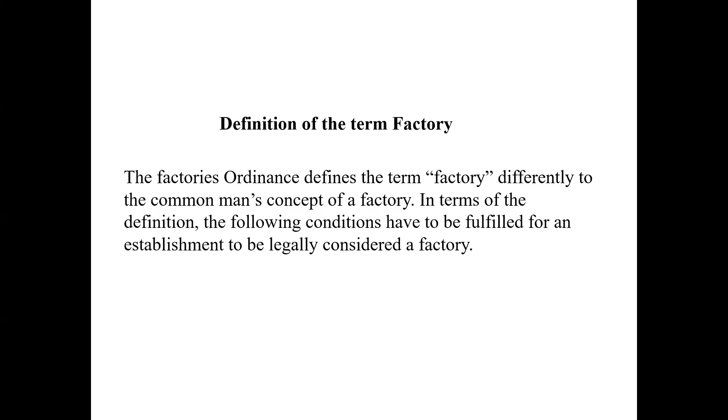So there's a definition introduced by the Factories Ordinance defining the term factory. Number one, it should be situated in a premises. Number two, persons or at least one person should be employed. Number three, in manual labor.

Number four, for making of an article or part of an article, or altering, repairing, ornamenting, finishing, cleaning or washing, or even breaking up or demolition, or adapting for sale of any article. So it gives clear identification for these processes on any article.

Number five, work should be carried out by way of trade or for purpose of gain. Number six, the employer should have the right of access to and/or control of the premises. The owner or organization should have access to and control of the premises of the factory.

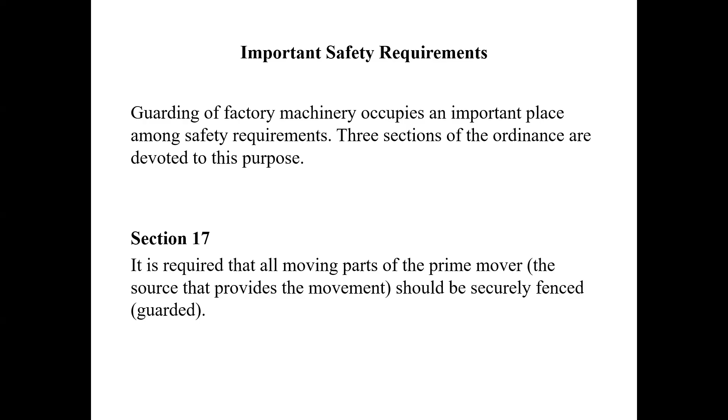Then section 18. It is required that all parts of transmission machinery, such as belts, shafts, chains, toothed wheels etc. - the moving parts - should be securely fenced. So in transmission machinery, all moving parts should be securely fenced.

Then section 19. It is required that all dangerous parts of other machinery - now we have discussed prime mover, then transmission machinery, then we come to dangerous parts - should be securely fenced so as to be safe to all persons employed or working in the factory premises. All moving and dangerous parts of machinery should be securely fenced so as to be safe to all persons in employment. That is very important.

Now what is the dangerous part? The term dangerous part has not been defined in the ordinance. So under the Factories Ordinance, it has not been defined. The only guidance in this regard appears in case law, which interprets dangerous part as: a part of a machine is said to be dangerous if it is reasonably foreseeable cause of injury to any person, acting in a manner reasonably expected of a human being to act, in circumstances that may reasonably be expected to occur. So it gives a general description about dangerous parts.

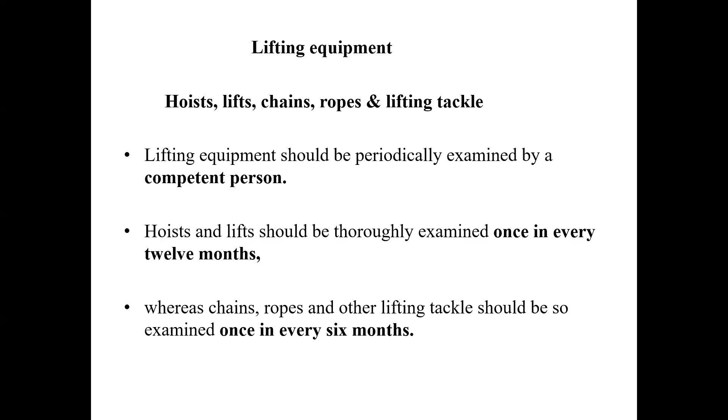So all lifting equipment should be periodically examined. Hoists and lifts should be thoroughly examined once in every 12 months, and given a certificate by that particular competent person, a report saying that all hoists and lifts are safe in working condition. Whereas chains, ropes and other lifting tackle should be examined once in every 6 months and given a certificate by a competent person.

Hoist. Every hoist or lift shall be of good mechanical construction, sound material and adequate strength. Safe working load has to be indicated. If it is to be used to carry people, a safe entrance and exit method shall be available, and a safety locking mechanism for doors should be installed. All these items are covered under section 27 of the Factories Ordinance.

Then we will come to chain, rope and lifting tackle again. No chain or lifting tackle shall be used unless it is of good construction, sound material and adequate strength. No chain, rope or lifting tackle shall be used for any load exceeding the safe working load - you can't exceed the safe working load.

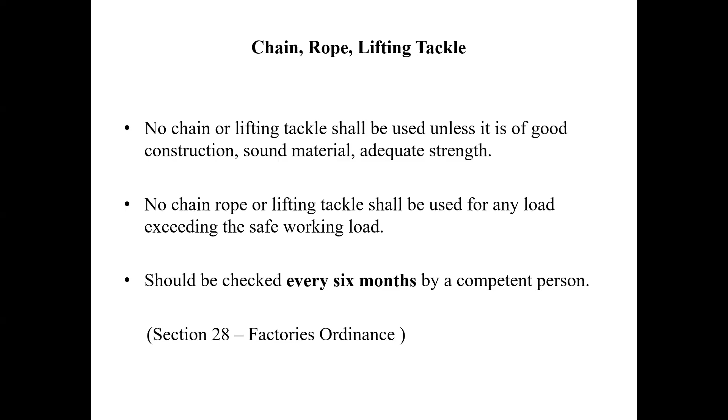It should be checked every 6 months by a competent person, as mentioned earlier. All these sections are covered under section 28 of the factories ordinance.

Now we will come to pressure vessels. Safe pressure has to be indicated in the vessel - that is very important. A safety valve should be installed to the vessel, and a pressure gauge has to be fitted to the pressure vessel. These things are very important in considering pressure vessels.

A testing hole should be provided to inspect the inside of the vessel and for cleaning purposes - there should be a testing hole provided in the pressure vessel.

Test for pressure vessels: for steel or non-ferrous pressure vessels, testing pressure P should be equal to 1.5 times the maximum allowable working pressure, MAWP. So testing pressure should be 1.5 times the allowable working pressure - that is for steel and non-ferrous pressure vessels.

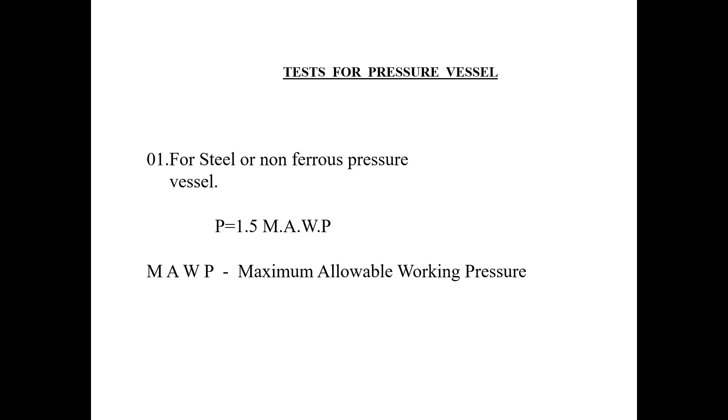For cast iron pressure vessels, there are two cases. In case the maximum allowable working pressure is less than 1 kilogram per centimeter squared, the testing pressure should be 2 times that, that is 2 kilograms per centimeter squared. In case the maximum allowable working pressure is greater than 1 kilogram per centimeter squared, then the testing pressure should be 2 times that value, MAWP.

Then we will see the other conditions of boilers and air receivers. Boilers, air receivers and other pressure vessels should be examined periodically by an authorized person, as mentioned earlier, in accordance with the following time schedule.

Boilers: once in every 12 months. Gas receivers, again by a competent person, once in every 12 months. Air receivers, once in every 24 months. Steam receivers, once in every 24 months. These are laid down in the factory's ordinance regulations.

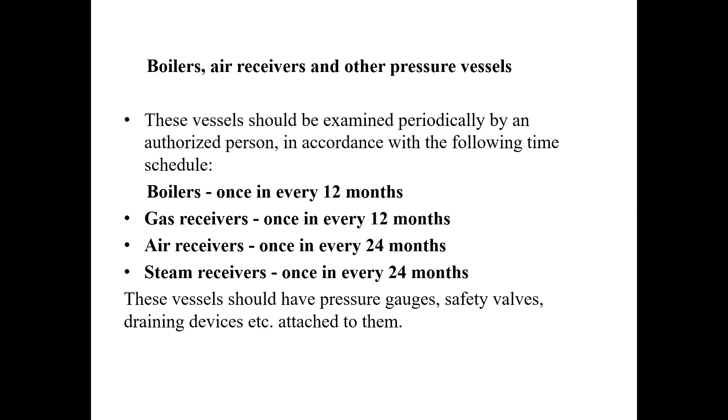Then you can see a cross-section of a fire tube boiler. If you refer to any boiler catalogs, you can see this draft sketch, which gives the fire tube boiler.

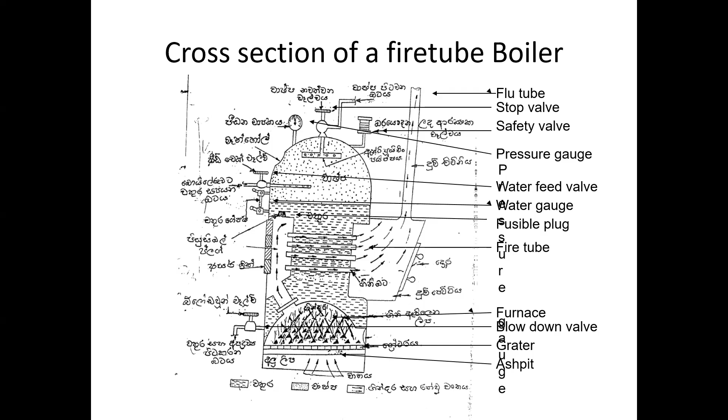Under the Factories Ordinance 1942, number 45, as mentioned earlier, if a boiler is transported or shifted to another place, it should be tested and certified again. So when a boiler is transported or shifted from one working place to another, again this boiler should be tested by a competent person.

And again, after major repairs, it should be tested and certified on completion. When major repairs have been completed, again, it should be tested and certified.

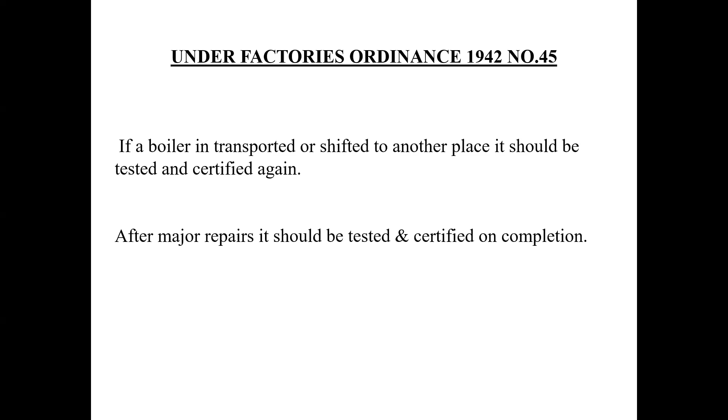Steam boiler attendant certificate of competence. So every boiler should have a boiler attendant. The boiler attendant certificate of competence gives details under the factory's regulation.

As mentioned earlier, under the factory's ordinance, there are many regulations issued from time to time. So, factory's regulation number 1965, published in Ceylon Government Gazette number 14,495, dated 3rd September 1965. This particular regulation covers boiler attendant certificate details.

Class 3 is the minimum level. A Class 3 boiler attendant has to be there up to a steaming capacity of 2,000 pounds per hour. So a class 3 boiler attendant should be available, with 1 year experience as a foreman or assistant to a certificated boiler attendant.

Then we will see the other one, class 2 - higher than the class 3 level, up to a steaming capacity of 6,000 pounds per hour. That person must have 3 years experience attending to a boiler. These requirements are in addition to the conditions for class 3 certificates, so in addition to class 3 qualification, this has to be obtained.

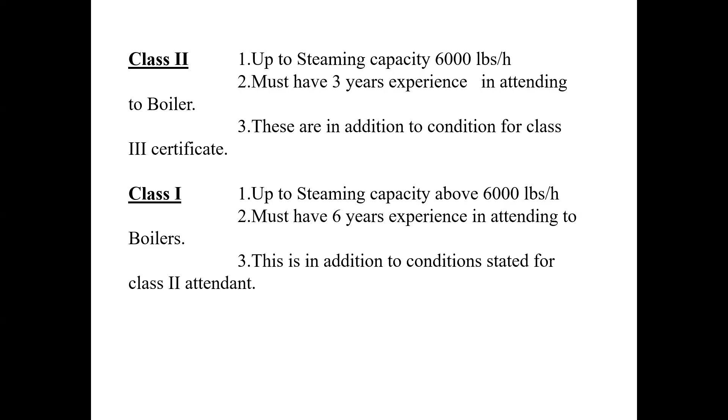Boiler explosion causes. We will see what are the explosion causes of a boiler.

Inoperative safety valve. Low water in the boiler. Scale deposits too high.

When we operate the boilers, the scales are deposited in the boiler, so these scale deposits have to be removed from time to time for maintenance work. If scale deposits are too high, there may be an explosion.

Oil in the boiler water. Corroded or thinner parts of the boiler plates. Cracks in the boiler.

Improper repairs. These are the 7 conditions we have to be very careful about. The safety valve could be adjusted to plus 10% of the marked pressure.

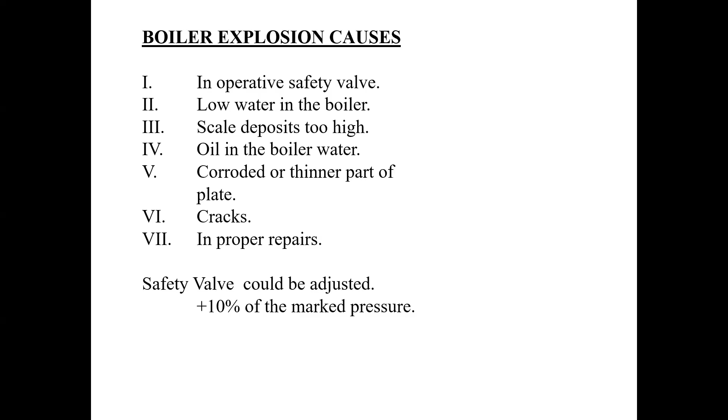Boiler operator's notes. Test safety valve monthly for its performance. Boiler operators have to be very careful about these activities, and should be aware of these things.

Number 2, blow down frequently to clean interior of the boiler. We have to blow down the boiler frequently for interior repairs of the boiler.

Number 3, see adequate lights are there at switchboards, panel boards, water gauge, pressure gauge, temperature meters, and all other important places. Adequate light should be available to see all these things.

Do not depend on fully automatic devices since they may fail. Test all automatic devices periodically.

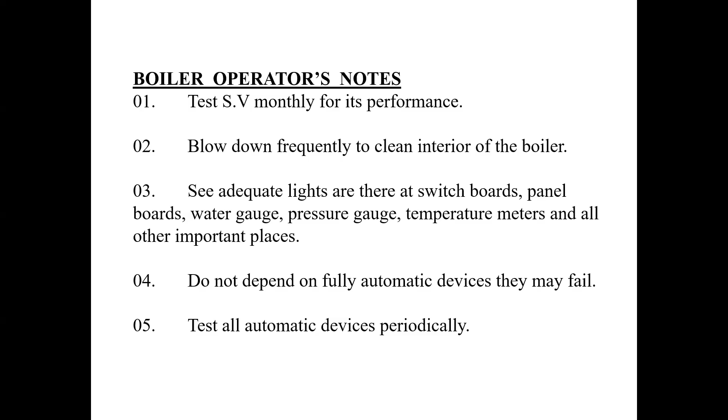Clean the boiler and keep it neat. Check the flame and flue gases at the chimney. It should be light brown color. Check temperature at the stack chimney.

Check the feed water. Clean filters periodically. When switching off the boiler, keep water at its maximum level.

Essential features of a good boiler. Number 1, the boiler should be light in weight, compact, and should use less space. Number 2, it should allow easy, cheap, and quick maintenance work.

These are essential features of a good boiler. It should be capable of starting very quickly. Number 4, it should be capable of accommodating large variations of loads.

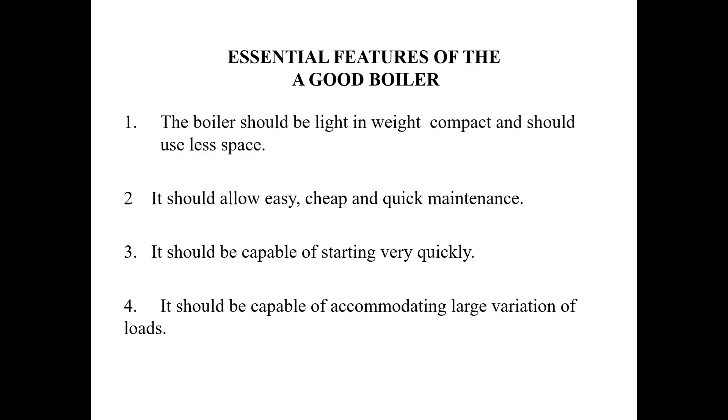Number 7, water scaling and soot should not collect on its tubes. Scaling should be removed from time to time.

Safe means of access and safe place of employment. Safe means of access to the place of work should be provided and maintained according to the factory's ordinance regulations.

If a person is liable to fall from a height of more than 6 feet, especially in construction sites, means should be provided to ensure his safety, such as by the provision of safety belts, nets, etc. You can see in construction sites all these safety nets are available because the people are working more than 6 feet up.

No person should be permitted to enter a confined space unless steps are taken to remove any fumes, toxic or irrespirable gases. Persons entering such spaces should wear breathing apparatus and be provided with a lifeline.

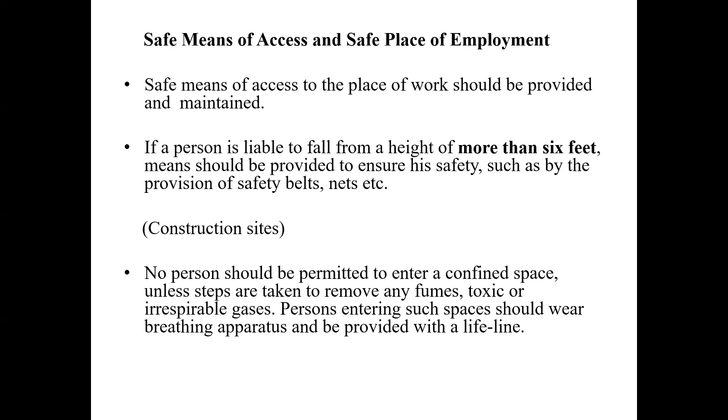Occupational health.

Occupational health. A close relationship exists between man's work and his health.

It is possible to recognize four important relationships. Number one, work can give rise to diseases. Work can exacerbate existing diseases. Illness may affect a worker's ability to work safely and efficiently, and work promotes health.

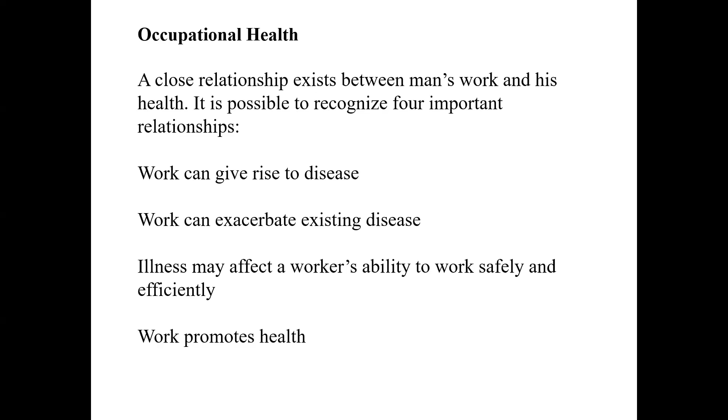These are very important activities for the function of occupational health. Many diseases arise from exposure of workers to various environmental hazards: physical, chemical, biological, and psychological.

Some diseases are made worse by certain types of work. For example, workers with chronic lung diseases, such as chronic bronchitis, experience worsening of their illness if they are exposed to a very dusty work environment.

Standing for long periods at work can aggravate existing varicose veins. The knowledge of the nature of work to be undertaken by a prospective employee is thus of extreme importance for placing him, particularly if he has some disability, in a job best suited to him.

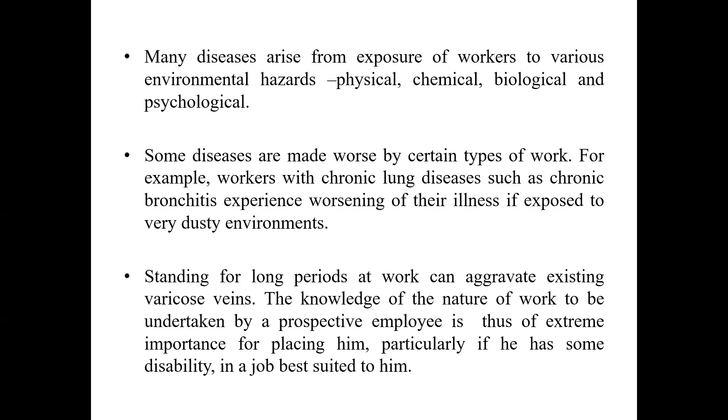People who suffer from certain illnesses are unsuitable for employment in certain types of work, as they may not be able to perform such jobs efficiently and safely. Such persons may not only expose themselves to danger, but may, in certain situations, be a danger to others working in the organization.

It is well known that persons suffering from red-green color blindness are unsuitable for employment as train drivers, and good visual acuity is essential for driving any type of vehicle.

Deaf persons are unsuited for jobs where communication is important, and also in workplaces where it is necessary to recognize auditory alarm signals. A pre-employment medical examination will assist in the proper selection of persons and should be mandatory in work which is dangerous or unsafe.

Most people gain a sense of satisfaction by working. That is a normal behavior. It has been observed that when work is satisfying, there is an improvement in a worker's health. So this is very important. Work that does not satisfy, or unemployment, will conversely lead to poor health in general practice.

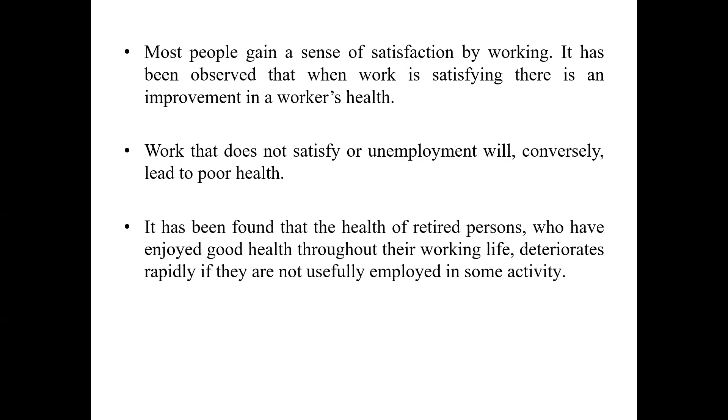Certain special problems in common with other developing countries occur in Sri Lanka. In tropical countries, heat is a problem experienced in many working situations, including working outdoors. Many workers suffer from discomfort and fatigue, and some experience heat cramps, heat exhaustion, and heat stroke.

Certain materials and processes which are found in Sri Lanka have not been adequately studied. Many vegetable dusts, such as rice husk, veepotu, coconut husk, chili powder, and tea fluff, the adverse effects about which little information is available need further study.

With changing technology, modern machines and processes are introduced, replacing old technology with new. From time to time, new technology comes and new methods will appear. In agriculture, tractors and other machinery as well as fertilizers and pesticides are being used, exposing farmers to new hazards.

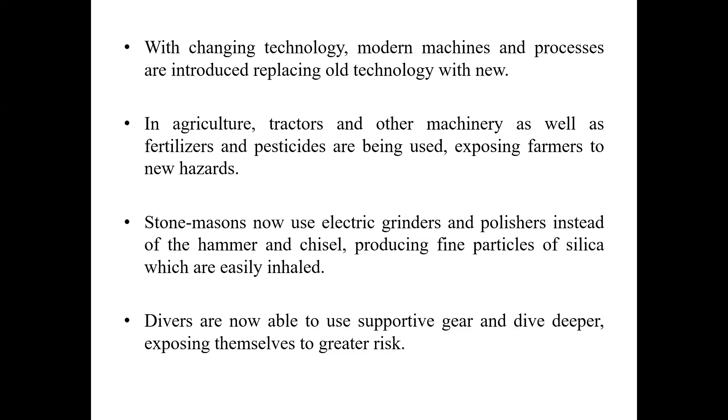Rapid industrialization and agricultural development has brought about large-scale migration of population, causing social dislocation, poor living conditions, and an increased incidence of communicable and social diseases. Undertrained workers are often employed in skilled jobs and experience more accidents.

In order to achieve the aims of occupational health, many countries have encouraged the establishment of occupational health services for workers. In certain organizations, they have established occupational health services to assist workers, giving advice regarding all these matters. There's no legal provision in Sri Lanka to compel employers to provide occupational health services for workers.

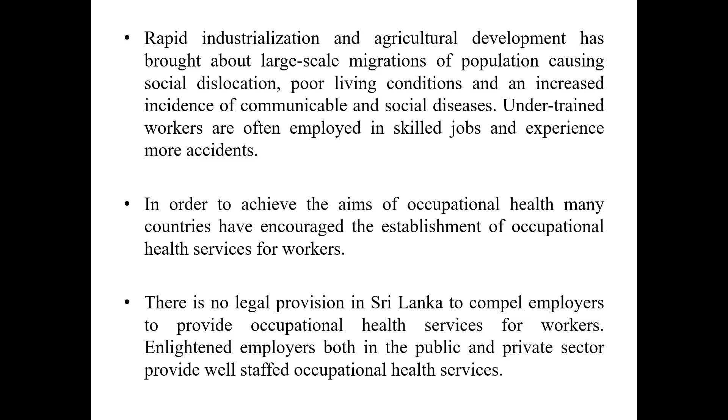Enlightened employers, both in the public and private sector, provide well-staffed occupational health services. Some important functions of an occupational health service are described as given below.

Placing people in suitable jobs. This activity includes pre-employment medical examinations and post-sickness medical examinations to determine fitness to work.

Next, providing treatment services. Early treatment of injuries, poisoning, and illness will prevent complications and assist rehabilitation.

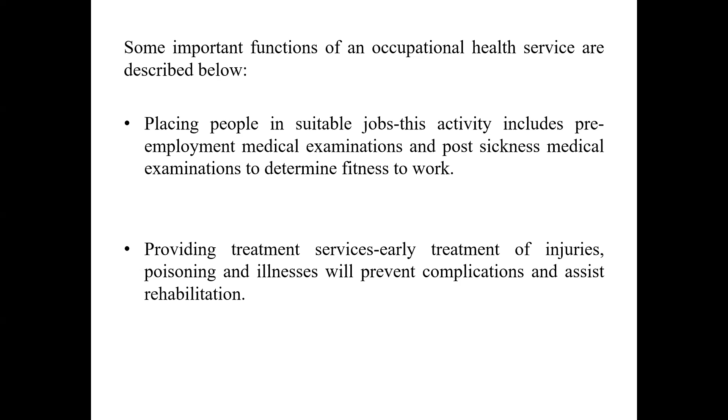Controlling hazards in the work environment. Many hazards are already known, and adequate precautions should be taken to ensure the safety of workers from being exposed to undue risks.

Avoiding potential risks. It involves participation of the occupational health staff in the planning and designing stage of a new plant to ensure freedom from risks and ensuring the installation. So before installing any new machinery, participation of the health staff at the designing stage for a new plant is needed to ensure freedom from risks.

Supervision of vulnerable groups. These groups include the young, who may need initial support during acclimatization to the new environment. Especially the young people have to be trained regarding these health activities and diseases.

Educating workers and management and providing counseling. The workplace provides excellent opportunities not only for education of workers in occupational health and safety practices, but also on general health topics.

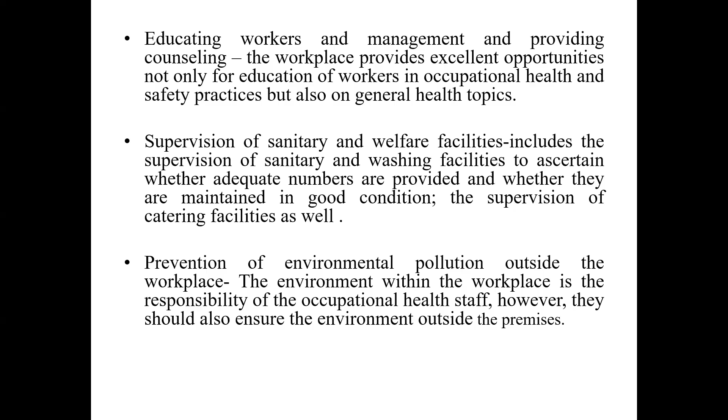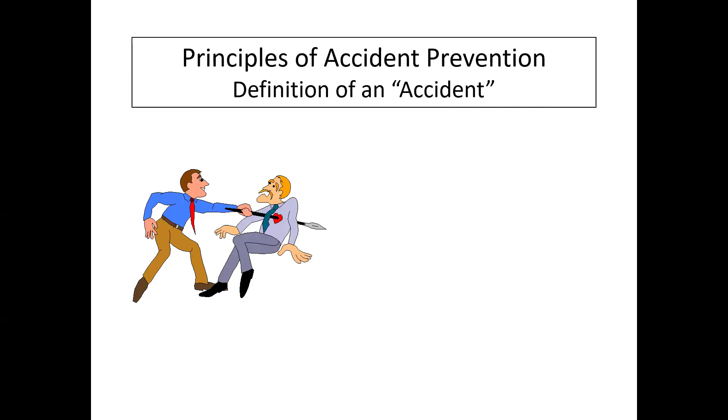Now we will come to the principles of accident prevention, definition of an accident. Any unplanned event that resulted in injury, ill health to people, or damage or loss to property, plant, materials, or the environment, or a loss of business opportunity. That gives a definition of an accident.

Unplanned event that resulted in injury, ill health to people, or damage or loss to property, plant, material, or the environment, or a loss of business opportunity.

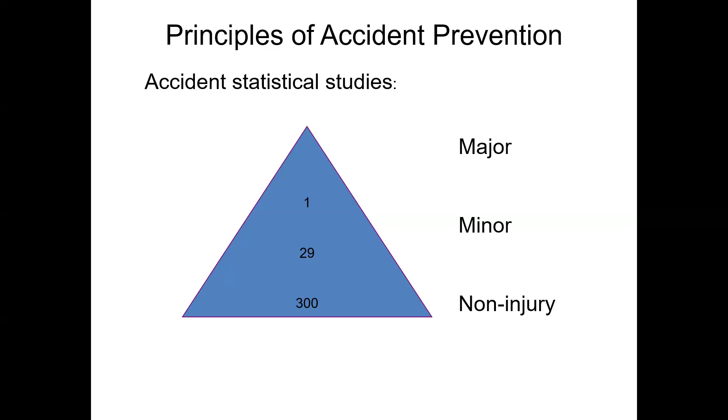Principles of accident prevention. Accident statistical studies give a rough idea, though this can vary from time to time, about non-injury, minor and major accidents. In 300 non-injury accidents, it will become a minor accident. Then again, after 29 accidents, a major accident will occur from a particular machine or equipment. It's just a rough idea, and this can vary from time to time.

Principles of accident prevention. There are three reasons for accident prevention, and these are the three important things: legal reasons, humanitarian reasons, and economic reasons. The legal reasons are covered by the accident prevention provisions of the Factories Ordinance, and all legal parts are covered by the Factories Ordinance and the regulations issued from time to time under the ordinance.

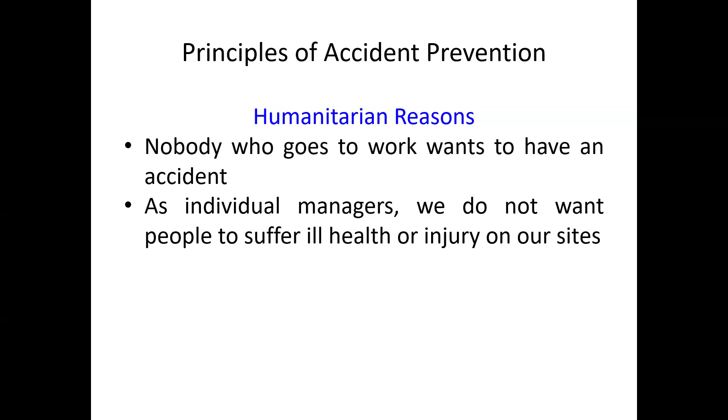What are the humanitarian reasons? Nobody who goes to work wants to have an accident. As individual managers, we do not want people to suffer ill health or injury on our sites or workplaces. These are the economic reasons.

Cost to the individual, the company, and to the country. These are the economic reasons, so accident prevention is very important. Cost to the individual, the company, and to the country includes insurance costs, which we have to pay. Damage to product and material, plant, building, tools, and equipment. Legal costs—in certain cases we have to pay legal costs for certain accidents. So accident prevention is very important.

Production delays, continued. These are again economic reasons: overtime working, investigation time—when there's an accident we have to investigate the activity involved, which is also an economic reason—supervisor's time diverted, and clerical effort, as all these things have to be recorded. Later I will explain how you record all these accidents and details. Also, loss of expertise and experience.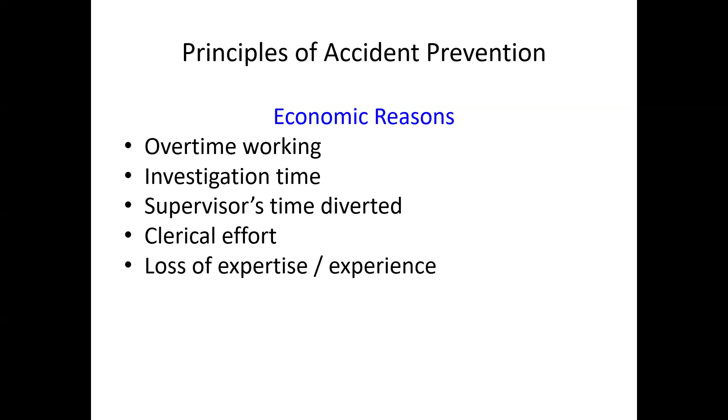Components of an accident: the pre-accident, the accident itself, and the results of the accident.

Unsafe acts—what are these? Working without authority. There are certain machines that only experienced persons should operate, but in certain cases some people work without the authority of higher management. So these are unsafe acts.

Failure to warn others of danger. Leaving equipment in a dangerous condition. Misusing equipment, using wrong speeds, etc. Disconnecting safety devices such as guards. Using known defective equipment, using equipment in the wrong way, or using equipment for wrong tasks. As engineers, you can see all these are unsafe acts, so we have to be very careful about these things.

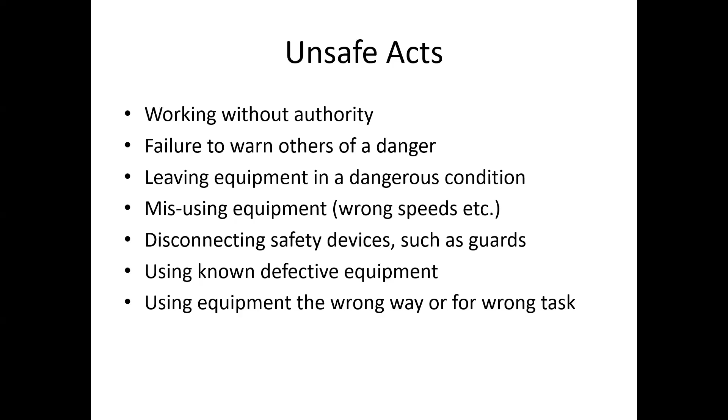Failure to use or wear personal protective equipment is very important—in certain cases we don't wear protective equipment, and this falls under unsafe acts. Also bad loading of vehicles, failure to lift loads correctly both mechanically and physically, being in an unauthorized place, and unauthorized servicing and maintaining of moving equipment.

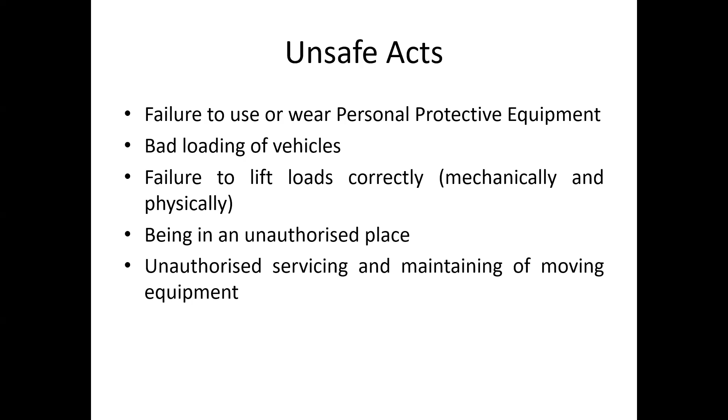Unsafe acts also include horseplay, smoking in areas where it is prohibited, and drinking alcohol or taking non-prescribed drugs. These are unsafe acts.

Unsafe conditions: inadequate or missing guards to machines. As I explained earlier, sections 17, 18, and 19 of the Factories Ordinance cover guarding of machinery, prime movers, transmission machinery, and other machinery. So inadequate or missing guards to machines can be an unsafe condition.

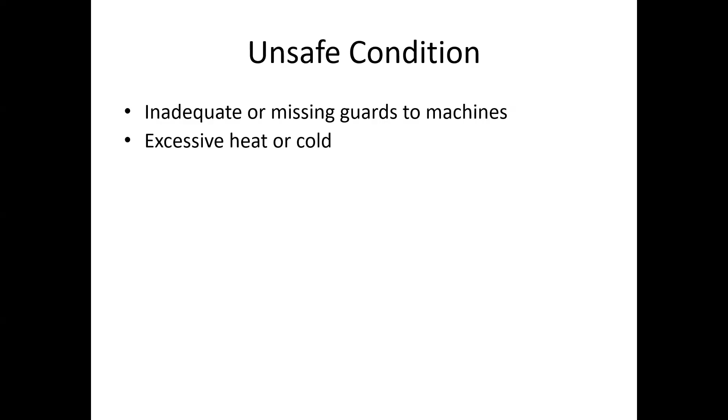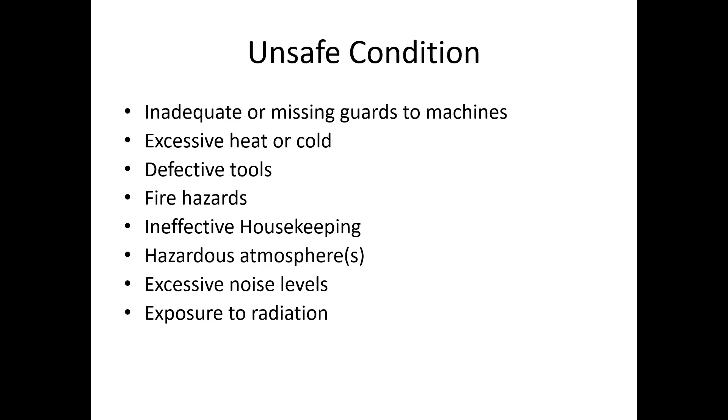Other unsafe conditions include excessive heat or cold, defective tools, fire hazards, ineffective housekeeping, hazardous atmosphere, excessive noise levels, exposure to radiation, and inadequate illumination or ventilation.

What can we do to prevent accidents? Principles of accident prevention: an essential first step is risk assessment. In this first step, we have to measure the risks of particular machines or the activities of the factories—identify the hazards, identify those who may be affected, and identify the risks.

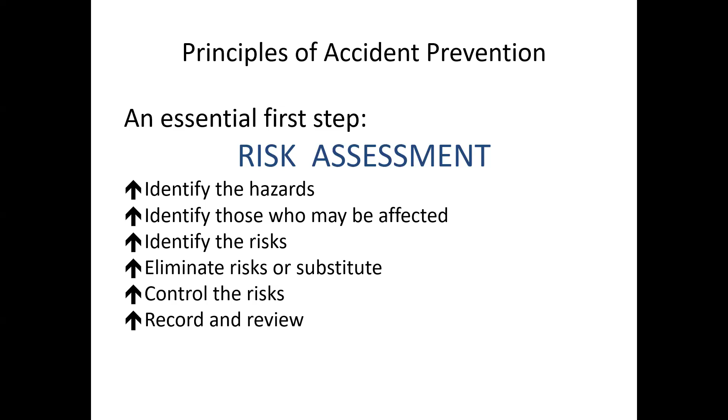Eliminate risks or substitute, control the risks, and record and review. This risk assessment is very important in accident prevention activities: identify the hazards, identify those who may be affected, identify the risks, eliminate risks or substitute, control the risks, and record and review.

Then the second step is the method statement. We have to prepare the method statement after analyzing the risks. All operations requiring method statements must have them.

All method statements must be approved by a competent person. Method statements must be understood by the personnel undertaking the work. These statements should be explained to the people and must be understood by the personnel undertaking the work.

Method statements must be followed, and random checks made to ensure compliance. So once method statements have been prepared, random checks should be done whether workers or people in the organization follow the rules.

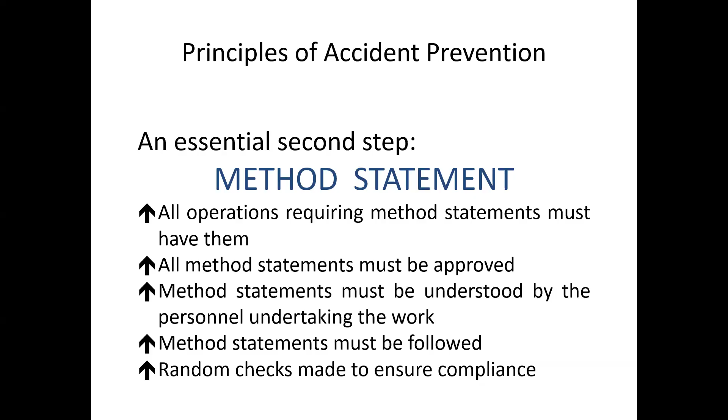Safety inspections. What is the purpose of an inspection? To ensure compliance with the law - meaning the guidelines and regulations issued by the factories ordinance to cover safety, health and welfare - and to ensure all are working safely within a safe place of work, and hazard spotting.

Safety inspections. Who could do it? Senior management, contractors management in construction sites and other places, safety advisors in certain organizations who appoint safety advisors for certain activities, enforcing authorities, external consultants, insurers, plant inspectors, etc.

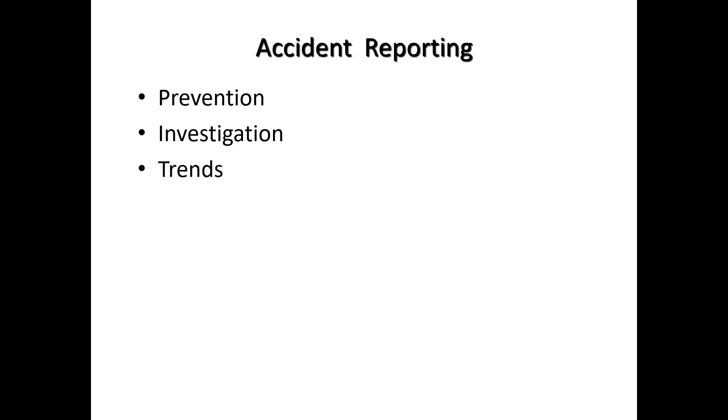Accident reporting covers prevention, investigation, trends, costs, research, enforcement, and future legislation. So accident reporting is very essential to cover all these things - prevention of accidents and investigation purposes. When we analyze accident reports, we can see the trend of a particular accident, then calculate the cost which happens in the accident. There is also some research you can do regarding this accident reporting method. Enforcement means introducing a new regulation or other law by the factories division, and future legislation.

Review of policies and procedures - from time to time, we can review the policies considering the current situation.

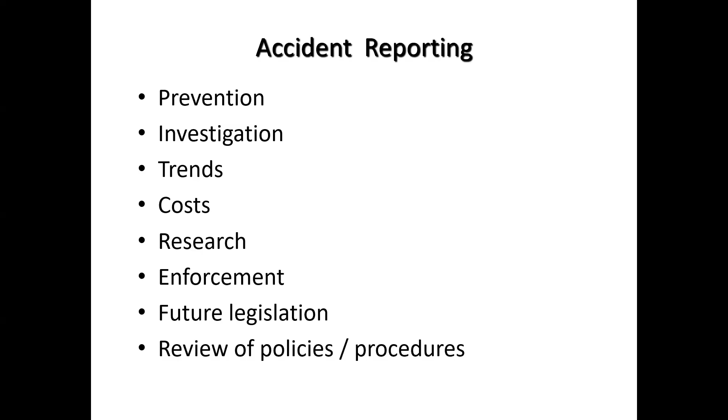Accident book: every accident involving personal injury to an employee must be entered in an accident book by either the employee or someone acting on behalf of the employee. So in a factory or construction site, accident books should be available according to the law, with personal injury details of an employee entered in this book. From time to time, Department of Labor officials will come to factories and sites to inspect these things. The accident book must be kept accessible and its location known to all employees.

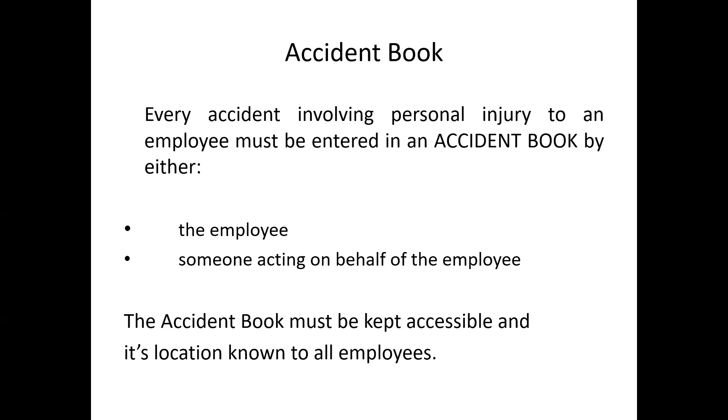Notification of occupational diseases: every registered medical practitioner attending on a patient whom he believes to be suffering from a notifiable industrial disease should give written notice to the Chief Factory Inspecting Engineer. The regulations issued by the Department of Labor give details of notifiable industrial diseases, which you can refer to later.

Then inquest into deaths - inquiries into sudden deaths, holding inquiries into deaths resulting from factory accidents.

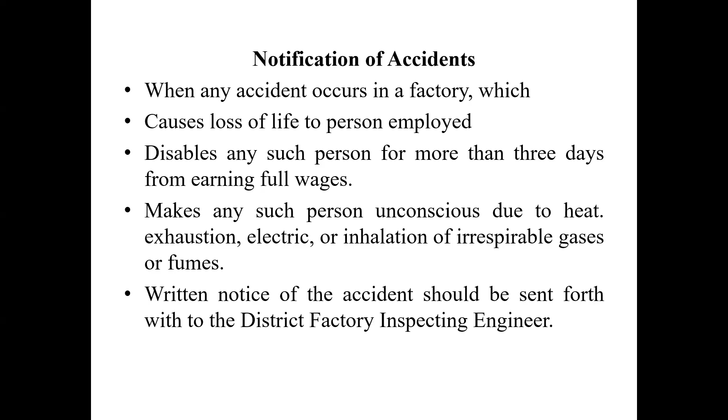Now we will come to another section, waste management.

Today, Sri Lanka is facing the problem of rapid industrialization and urbanization, both of which, if not adequately controlled, would lead to a pollution problem. This situation is further aggravated by the fact that Sri Lanka lacks the necessary financial resources for prevention of pollution. In Sri Lanka, most industries, both small and large, discharge their waste to the general environment with little regard to the community at large. In many organizations, waste is discharged unnecessarily into the environment.

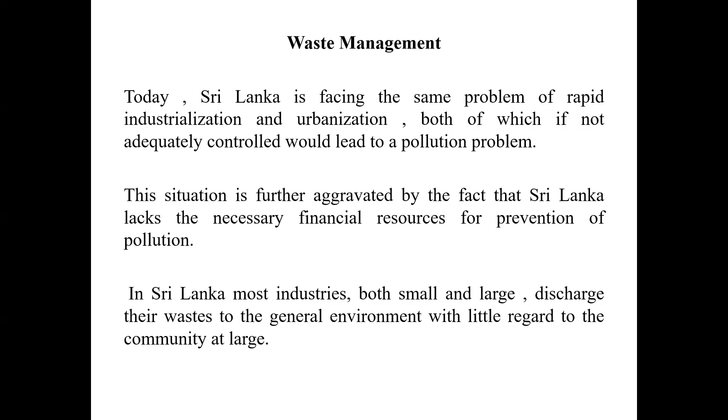Industrial waste includes raw materials, discarded factory products, intermediate products, packaging materials, sludge from treatment plants, and waste from factory canteens, including food waste, all of which is disposed of. This waste may exist in the form of gas, liquid, or solid - all three forms of waste are released.

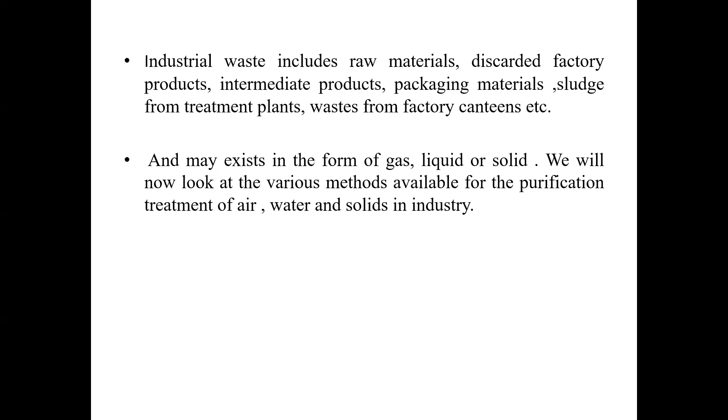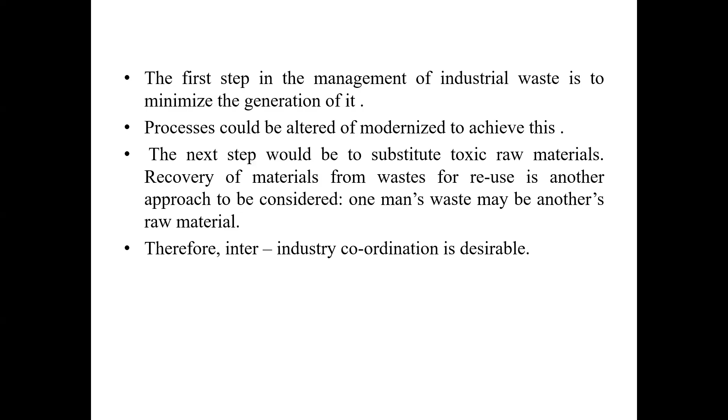We will now look at the various methods available for purification treatment of air, water, and solids in industry. The first step of managing industrial waste is to minimize its generation. Processes could be altered or modernized to achieve this. The next step would be to substitute toxic raw materials. Recovery of materials from waste for reuse is another approach to consider - one man's waste may be another's raw material. Waste from one organization could sometimes be used as raw material by another. Therefore, inter-industry coordination - maintaining relationships between organizations - is said to be beneficial.

Dry fabric dust collectors probably form the largest single group of air cleaning devices in this field, known variously as dust collectors, bag filters, bag houses, etc. Basically, they all employ a fabric filter - some sort of fabric used to arrest dust or fume. They are able to cope with heavy dust burdens and a wide range of particle sizes at high efficiency, removing dust effectively. A correctly rated fabric can achieve an overall efficiency of 99.8%, the average figure. The fabric dust collector must be self-cleaning, able to shed the dust burden collected by either manual or automatic activation of a cleaning mechanism, and then continue in operation. You can see details of these dry fabric dust collectors in many textbooks.

In most designs, the fabric filter is arranged as tubes, bags, or envelopes mounted on supporting frames, forming a permeable division between clean and dirty sides. The dust-laden air enters from below, passes upward through the fabric filter, and the clean air leaves via the discharge duct at the top. The dust, which could be shaken off, collects at the bottom. The common cleaning system is an intermittently functioning mechanical device which vigorously shakes the top of the filter bags. Different fabrics such as cotton, wool, nylon, and Terylene are used depending on the properties of the dust or fume.

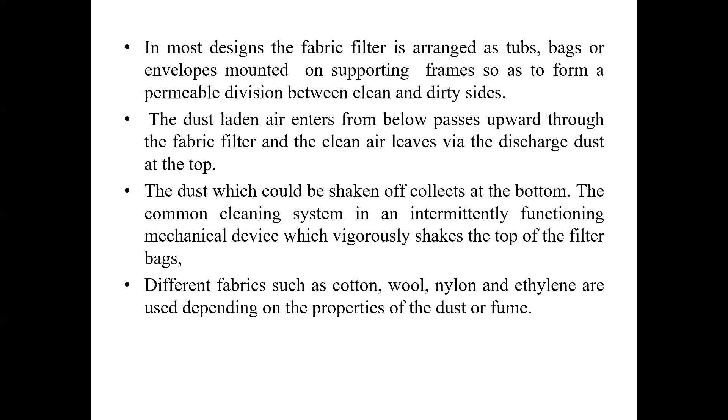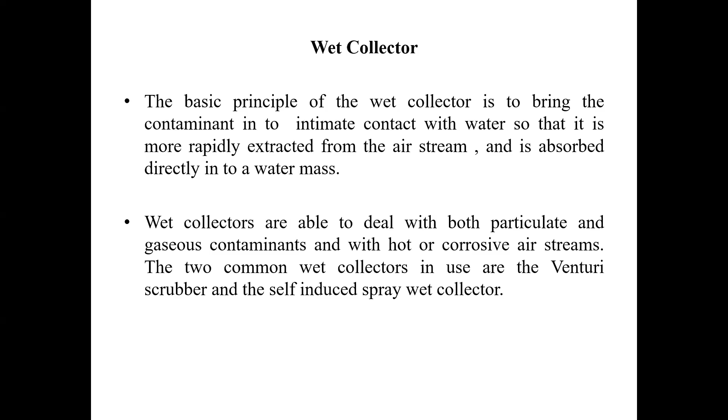Then the wet collector. The basic principle of the wet collector is to bring the contaminant into intimate contact with water so that it is more rapidly extracted from the airstream and absorbed directly into a water mass. Wet collectors are able to deal with both particulate and gaseous contaminants, and with hot or corrosive air streams. The two common wet collectors in use are the Venturi scrubber and the self-induced spray wet collector. Again, for wet collectors, you can go through textbooks which give details with diagrams.

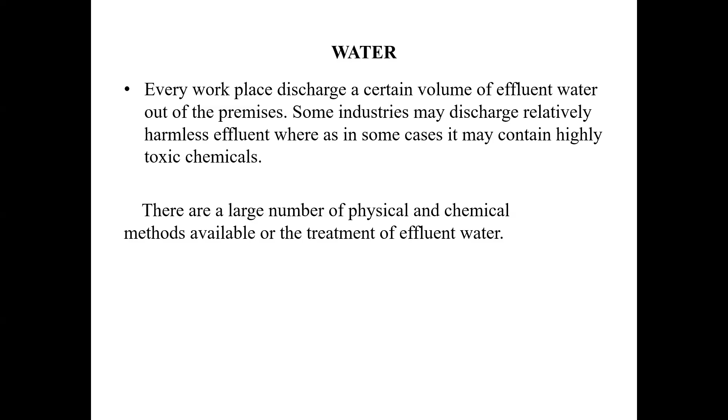Water. Every workplace discharges a certain volume of effluent water out of the premises. Some industries may discharge relatively harmless effluent, whereas in some cases it may contain highly toxic chemicals mixed with water. There are a large number of physical and chemical methods available for treatment of effluent water.

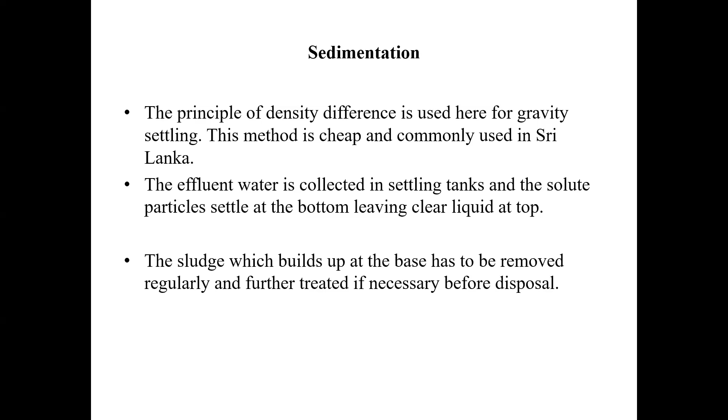One method is sedimentation. The principle of density difference is used here for gravity settling. The method is cheap and commonly used in Sri Lanka. The effluent water is collected in settling tanks and the solute particles settle at the bottom, leaving the clear liquid at the top of the vessel. The sludge which builds up at the base has to be removed regularly and further treated if necessary before disposal.

Flotation: in this process, substances which float to the top of the settling tank are removed using a skimming apparatus - an example is grease in water. For particles which do not readily float, the dissolved air flotation method may be used. In this method, the tank containing wastewater is pressurized. After sufficient time is allowed for air to dissolve, the pressure is released and the air now comes out of solution.

Filtration is a process in which separation of the pollutant is accomplished by the size difference of the particles. The effluent water is forced through a porous medium which results in a retention of particles in the medium.

Three types of media that could be used are beds, sands and asbestos, mesh screen or fabric, perforated surfaces, and certain membranes.

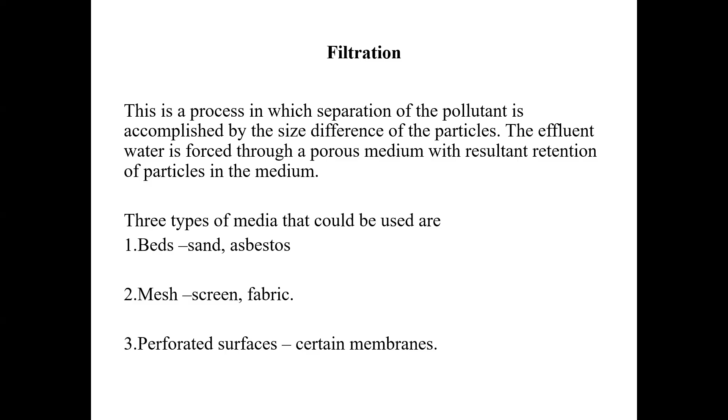Solid waste in industry may consist of unused raw materials, damaged final products, byproducts, packaging materials, leftover food, etc. Minimizing the generation of such waste should be the first line of action.

Incineration, an ancient disposal technique for getting rid of waste, is to burn it. While solving one problem, it creates others: air pollution due to smoke and unburned remains which have to be disposed of by another means.

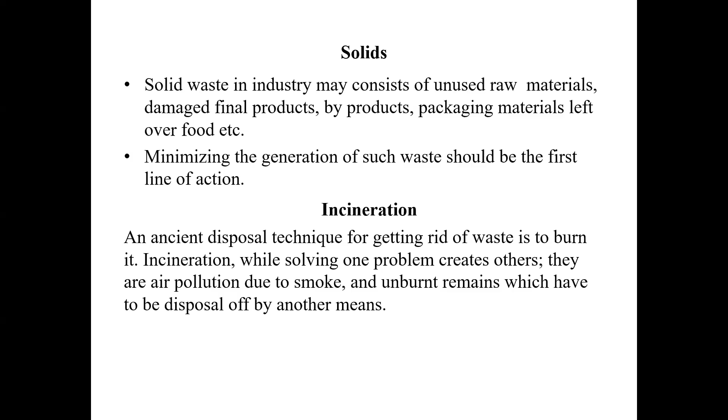Landfill is also a very ancient means of disposing solid waste. The solid waste is spread in layers and then compacted with bulldozers before another layer is spread. After the waste is about 3 meters deep, it is covered by a layer of soil and compacted again.

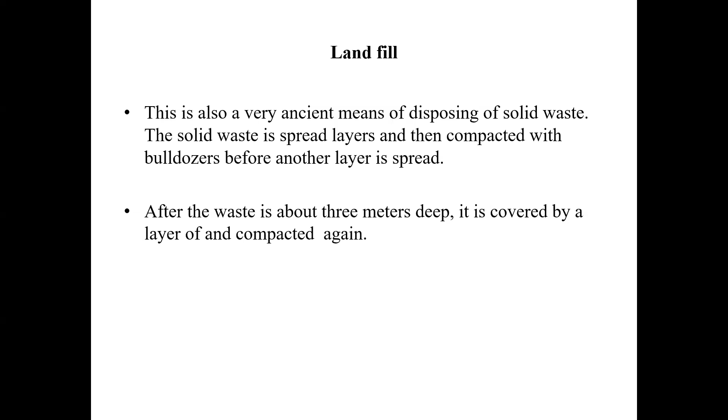We will come to another section, fire. Fire is the result of a combination in suitable proportions of a fuel, oxygen, and an initial source of heat. This combination is a chemical reaction in which a heated substance combines with oxygen to produce heat, light, smoke, and toxic gases. The reaction involves both heat consumption and heat production, with a net production of heat.

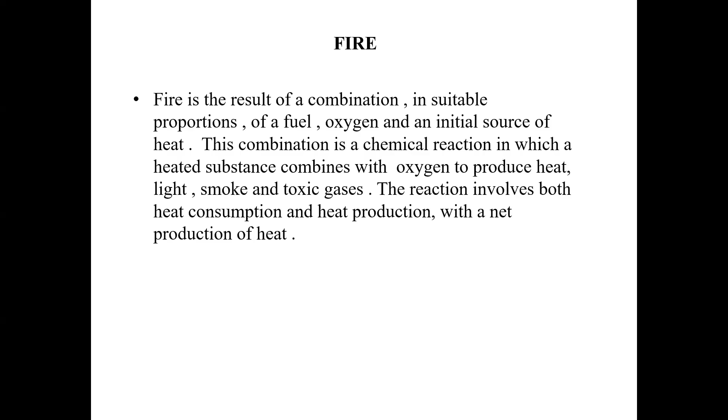Products of combustion: the application of heat to solids and liquids produces vapors at their surfaces which ultimately mix with air to cause a fire. During combustion, in addition to heat, new molecules are also formed. These are called the products of combustion.

Complete combustion can occur in a very hot, well-ventilated fire. In this situation, carbon dioxide and steam are formed from the oxidation of carbon and hydrogen respectively. Oxides of various other elements such as sulfur and nitrogen are also formed.

Toxic substances can also be produced in some fires. Hydrogen cyanide can be formed from burning of wool and silk, acetic acid from timber and paper, and carbon monoxide from incomplete combustion of carbonaceous material.

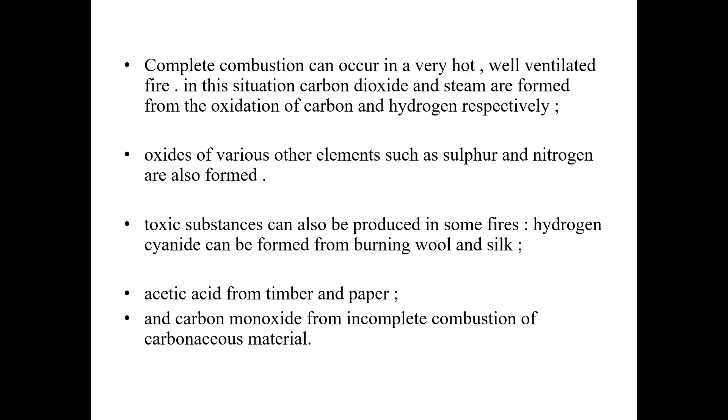Ignition sources: heat is one of the three factors necessary for combustion. It is readily available in industry from various ignition sources such as electrical apparatus and wiring, sources of static electricity, machinery, grinding, welding and cutting processes, heating and cooking processes, matches, and lighted cigarettes.

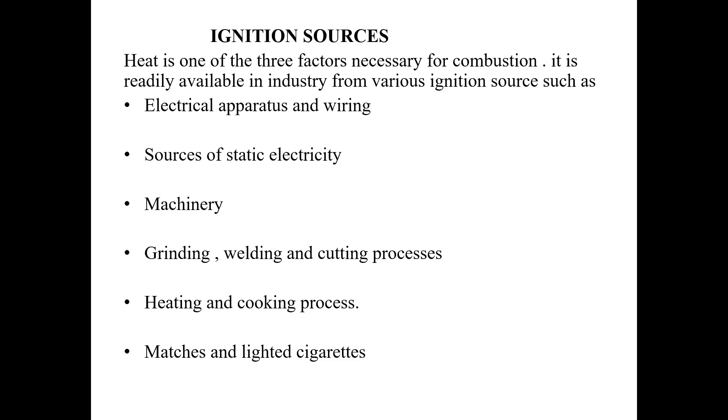Control measures: fire protection has to be planned at the design stage of buildings, taking into consideration the risks involved in the manufacturing process. High-risk areas should be protected with fire-resistant walls so as to prevent the rapid spread of fires.

Fire-resistant doors should also be provided for these areas to isolate them in case of major fires. Where appropriate, inbuilt systems for detecting, controlling, and extinguishing fires could be provided. Fixed automatic devices are available to extinguish fires. Sprinklers are installed, and these operate automatically in case of fire, sprinkling water or other extinguishing agents.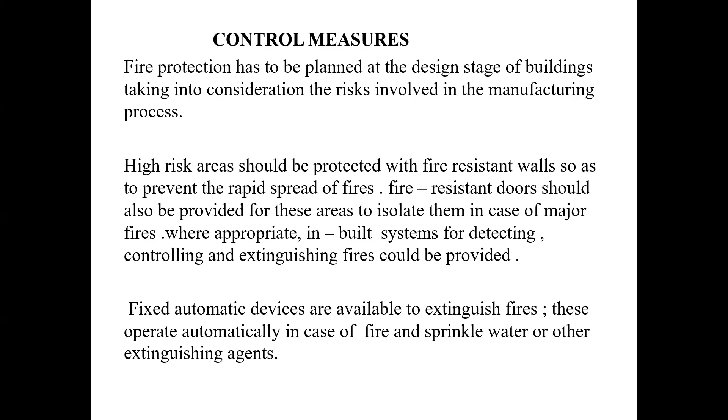Safe escape routes should be provided, and these should be maintained free of obstructions. Doors should open outwards to enable easy exit in case of fire. There should be good access routes around the building to assist the fire brigade, and hydrants and other facilities for firefighting should be provided.

It is desirable to install fire alarm systems in factories, and all workers should be trained in evacuation procedures by conducting fire drills regularly. This is very important. So in most organizations, they conduct fire drills and install fire alarm systems, and workers should be trained from time to time in evacuation procedures.

Preventive measures should be considered after thorough study of process, materials, and likely ignition sources. This involves identification of specific hazard areas, selection and purchasing of appropriate first aid firefighting equipment, and training of workers employed in these areas to use the equipment correctly.

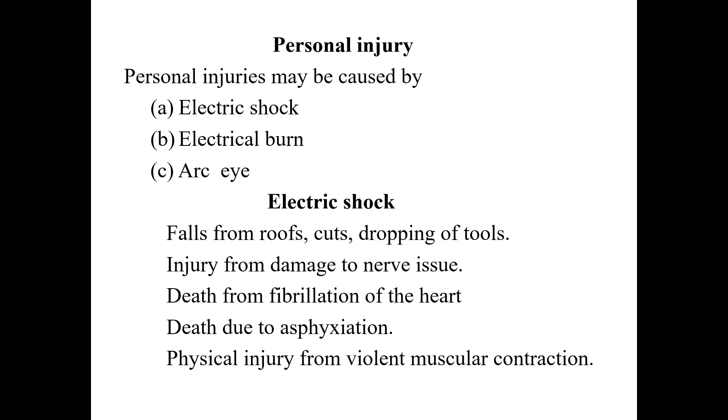Electric burns. Generally speaking, an electrical burn penetrates deeply and may take a long time healing, though the appearance of superficial damage may be slight. Direct current burns tend to be more acute than alternating current burns, due to the fact that the DC arc is more persistent than the AC arc, which latter tends to extinguish more easily at the moment when current passes through zero volts. Burns are invariably associated with physical shock, and great care is necessary in their treatment.

Arc eye is caused by ultraviolet rays from an electric arc, for instance in arc welding, reaching unprotected eyes. The condition is very painful, causing temporary loss of sight. The victim feels as if there are sand particles in his eye. The only way in which arc eye can be prevented is to wear eye protection of the correct type and to do welding in screened-off areas.

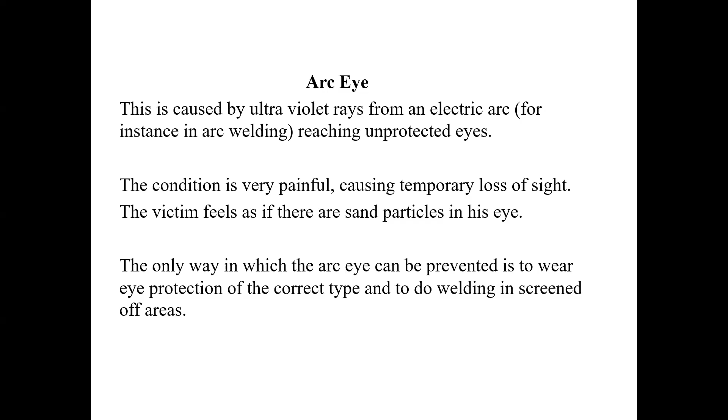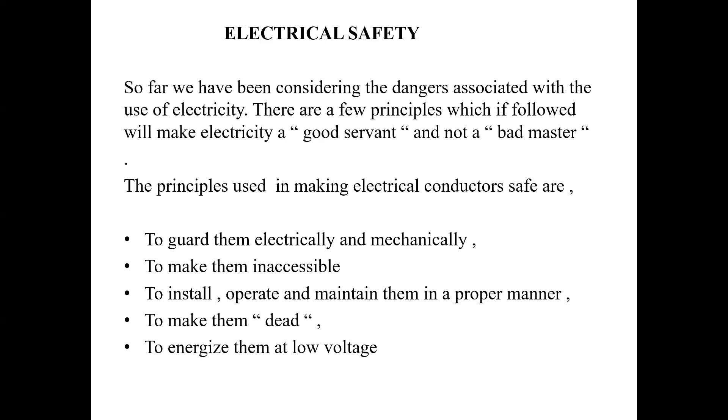Electrical safety. So far we have been considering the dangers associated with the use of electricity. There are a few principles which, if followed, will make electricity a good servant and not a bad master. The principles used in making electrical conductors safe are: to guard them electrically and mechanically, to make them inaccessible, to install, operate, and maintain them in a proper manner, to make them dead, and to energize them at low voltage. We will see what these things mean.

To guard them electrically and mechanically: electrical guarding is achieved by covering the conductor with an insulator, such as rubber, plastic, oil-impregnated paper, linen, glass, porcelain, etc. This is electrical guarding by covering the conductor. Mechanical guarding of the insulated conductor is done in various ways and can be in the form of soft metal tubes extruded over the insulated conductors, or fixed tubes through which the insulated wires are drawn, or in the form of steel-armored wires or tapes.

To make them inaccessible, bare conductors may be fixed on porcelain or other insulators, which in turn can be supported above.

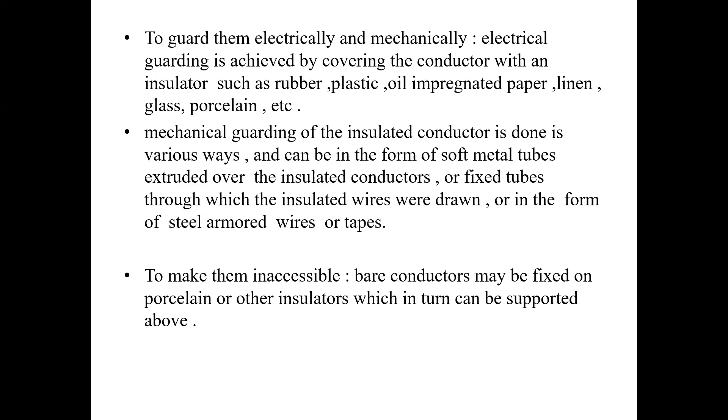To install, operate, and maintain in a proper manner means the circuits and apparatus must be designed, erected, and maintained by qualified and competent persons in conformity with the best current practices, and that the operators are trained in their work.

To make them dead - what does that mean? This is done by using circuit breakers and isolating switches. Conductors may also be made dead automatically on the occasion of a fault by means of fuses or circuit breakers.

To energize at low voltage means that if the voltage is reduced, then the current also gets reduced. In the case of portable electric equipment, or work in confined places, it is better to use low voltage.

Now we will come to another section, safety in the construction industry. Construction sites can be divided into two categories: buildings - houses, hotels, schools, factories; and number two, civil engineering sites - roads, dams, bridges, power stations, etc. It is observed that more accidents occur in construction sites when compared to factories, due to the following reasons.

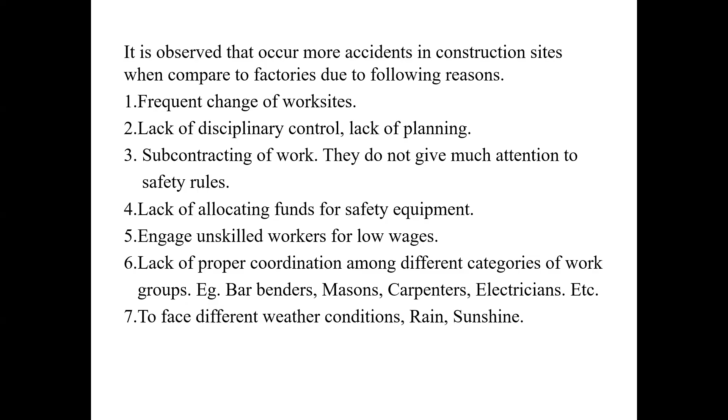Safety procedures implementation: prepare a comprehensive work plan at the beginning of work with the help of architects, design engineers, site engineers, technical officers, site supervisors, etc. Have a discussion and discuss details before starting the work.

Safety precautions should prevent the collapsing of walls during excavation of soil, and sufficient air should be provided in deep excavation. Safety precautions should be introduced in scaffolding work in high-rise buildings, and hoists, chains, ropes, and other lifting equipment should be maintained regularly, as explained earlier. Inspection of such items should be done periodically.

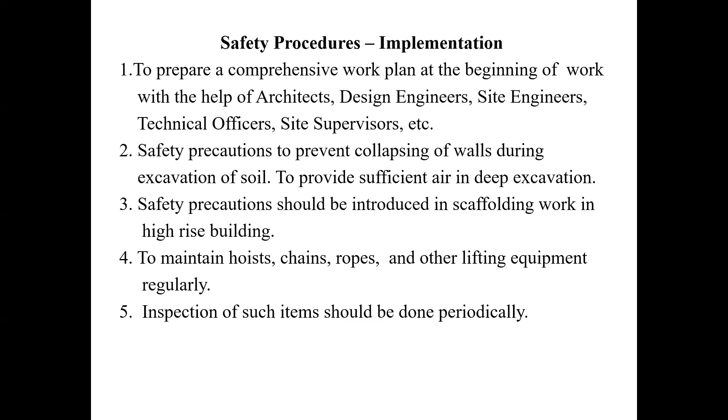Attention should be given to safety precautions in roof construction. Proper methods should be adopted in material handling and storage of materials such as steel, pipes, cement, sanitary equipment, etc. Laying electric cables, especially in temporary sheds at work sites, should be carefully done. Handling of explosive materials in road construction sites and underground tunnel construction sites requires special attention, as does fire safety.

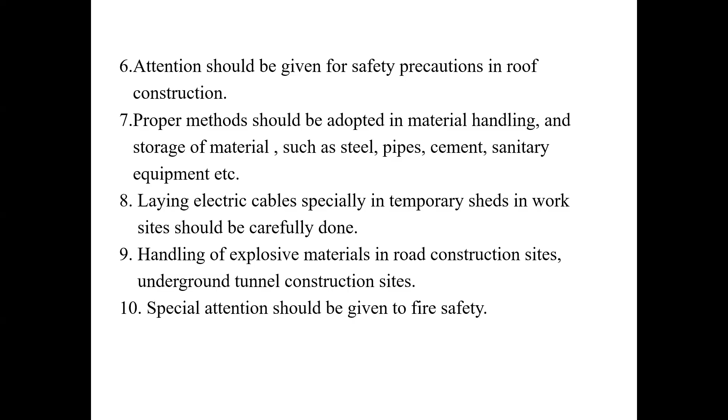Now we will come to another section, an important part of the ordinance: health and welfare. Cleanliness: every factory should be kept clean and free from effluent. Workspace: every person working in a factory should be allowed at least 400 cubic feet of free space, which is the minimum working space for a particular person.

In calculating the free space, no space above 14 feet from the floor should be taken into account. So when we calculate the area, we take the length and breadth, multiplied by the height, and for the height we take the maximum of 14 feet to calculate the volume. This gives 400 cubic feet of free space for a particular person to work in a factory.

Sanitary conveniences should be provided and maintained in all factories as follows. Under the regulations of the Factories Ordinance, for up to 100 persons, one toilet should be provided for every 25 persons, separately for male and female.

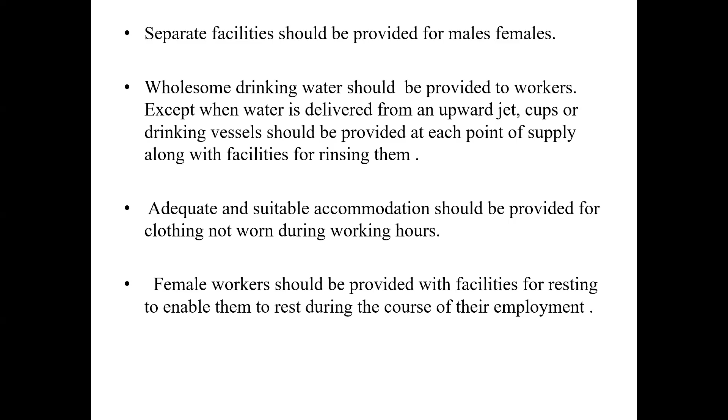Every factory should have first aid: a first aid box or cupboard with contents as specified in the regulations, and trained first aiders on every work shift. The management has to train certain people to provide first aid facilities to workers, ensuring a sufficient number of workers are trained in first aid.

Meal rooms which could accommodate at least one-third, nearly 30% of the total workforce at any one time should be provided.

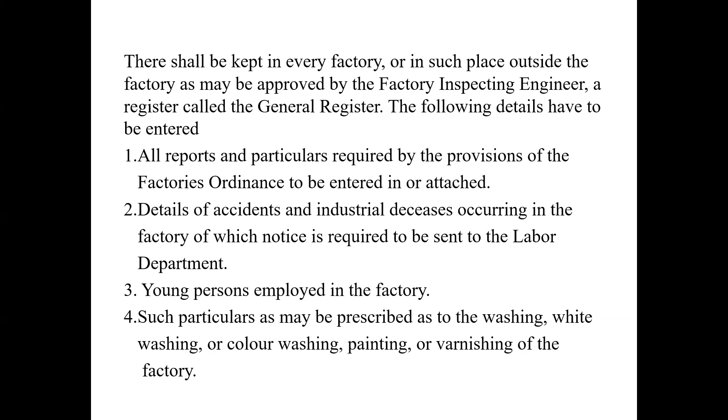Now I will explain about the Factories Division of the Department of Labor, mentioned earlier. In the Department of Labor, there's a separate division called the Factories Division. All the officers working in the Factories Division are civil, mechanical, and electrical engineers.

Enforcement of the Factories Ordinance to ensure safety, health, and welfare of workers in factories through the following activities, covered by the division: enforcement and implementation of the Factories Ordinance, inspection of factories, approval of building plans, attending coroner's court to give expert evidence.

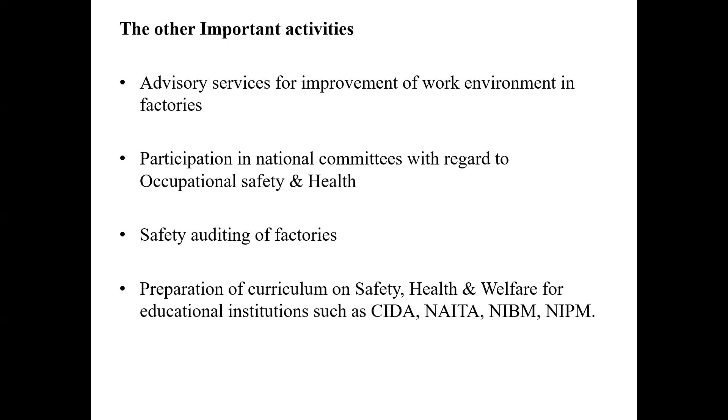In the Factories Division, the Chief Factory Inspecting Engineer is the head of the division. Under him, District Factory Inspecting Engineers cover all districts. Then under the District Factory Inspecting Engineer, normal Factory Inspecting Engineers work in all three fields: civil, mechanical, and electrical.

So these are the existing legislations: Factories Ordinance number 45 of 1942, with amendments — Factories Amendment Ordinance number 22 of 1946, Amendment number 54 of 1961, Amendment Law number 12 of 1976, Amendment Act number 18 of 1998, Act number 33 of 2000, and Act number 19 of 2002.

In addition to the above, the following regulations are also in effect for factories: Regulation of 1960; these regulations are prepared under the ordinance. Sanitary Convenience 1965, Dangerous Occurrences Notification 1965, Washing Facilities General 1965, Standards of Lighting Regulation 1965, Meal Room Regulations 1965, Steam Boiler Attendant Certificates of Competency 1965, Industrial Diseases 1972, Protection of Eyes 1979, First Aid Regulations 1995, and there are so many other regulations.